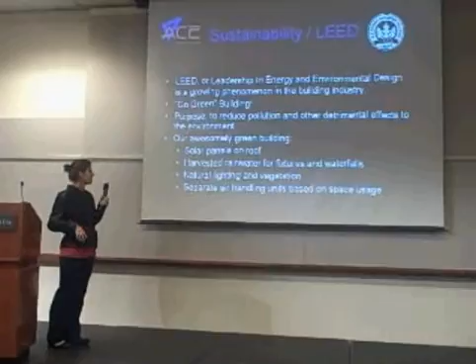Now what we did to make this work with our building is we put solar panels on the roof. This would absorb energy from the sun, and we could use it as electricity. We also harvested rain for the water fixtures outside, since it'd be kind of wasteful to use water from the city. This helps us reduce energy and save a lot of water.

We also use a lot of natural lighting. We put a lot of windows around our building that would help light it in the morning or around daytime. And like Ping explained, we have separate air handling units. This allows us to shut off energy that's not used in certain parts of the building, which helps us save a lot of money too.

So to explain construction, I'm going to hand it over to Anthony.

My name is Anthony, and I'm going to be discussing construction, and I'm going last because my team decided to save the best for last.

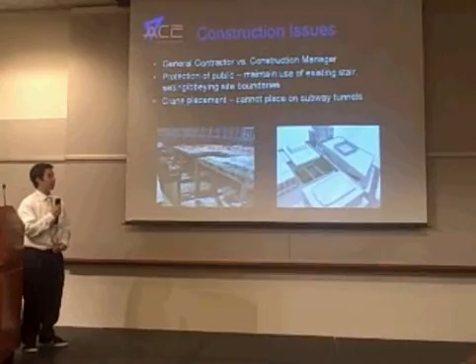So after the engineers and architects are done creating a solid final plan, they hand it over to construction. But to say construction is merely the hard labor of it is clearly an understatement. We have our own plethora of issues to deal with. One, for example, is crane placement.

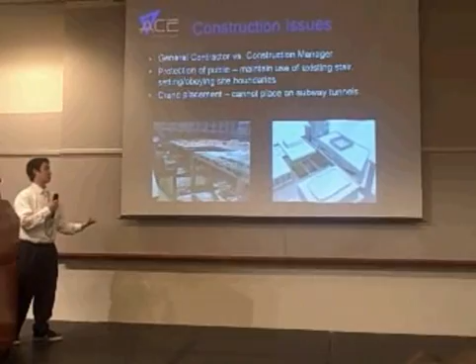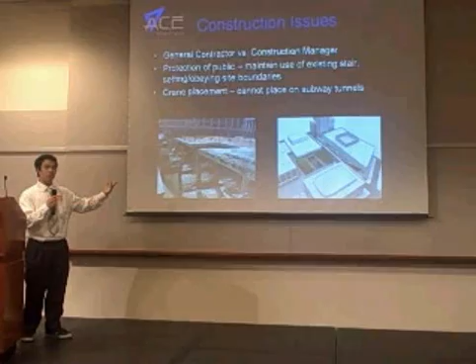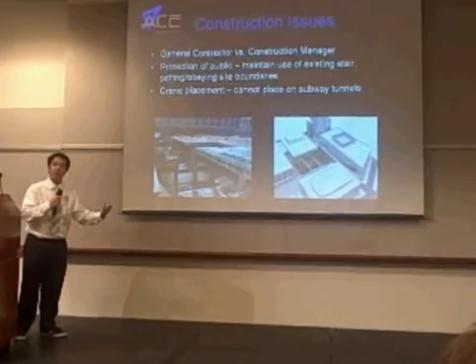Something as simple as cranes, as you see all over Manhattan, with construction going on every day, can definitely put the public at danger. Especially around Lincoln Center, which is a busy and industrial district, subway lines run through everywhere. Do we want to risk obstructing the structural integrity of our subway tunnels by putting our cranes down?

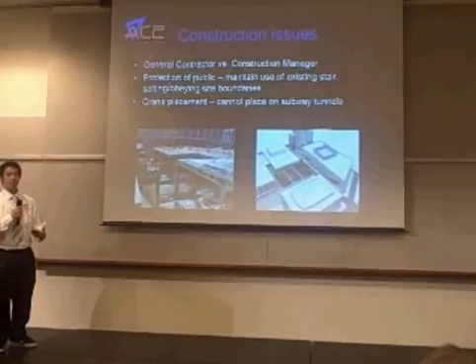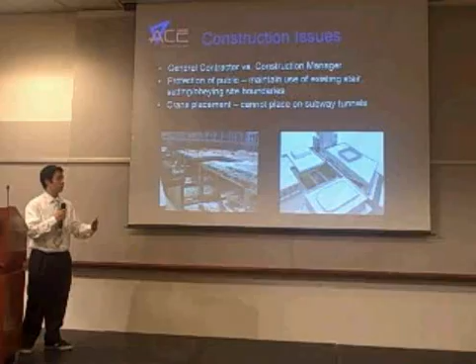This also ties into the protection of the public, because more often than not we have to go past the boundaries of our pre-established work area. But putting our work material and work process in the way of public walkways and stairs, which exist at Lincoln Center, would be putting the public at danger.

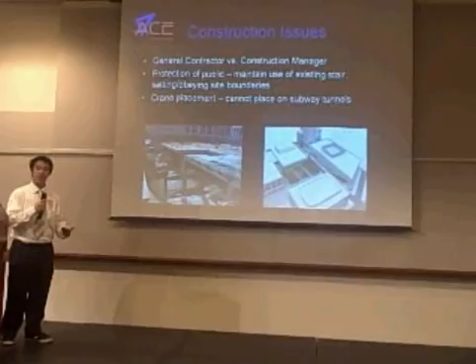So we have to sacrifice our workspace and work efficiency in order to protect the public. But sacrificing too much workspace would obviously have a negative impact on work efficiency, which would mean more cost, more funding, which would mean profits go down.

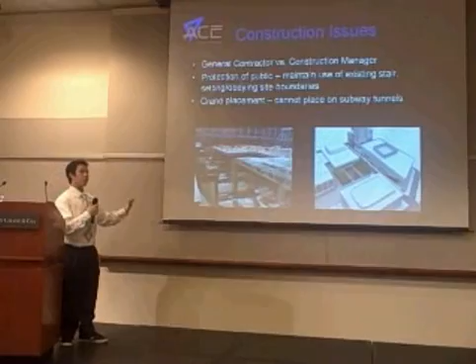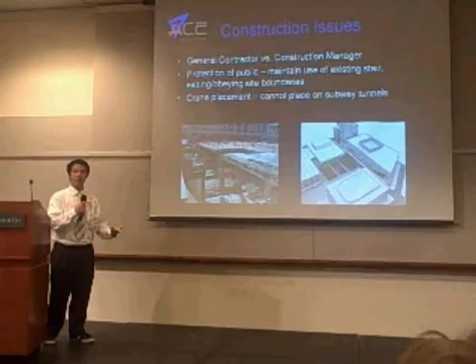And who do we hand these problems off to? General contractors and construction managers handle these problems. There's a difference between the two, if any of you didn't know. General contractors have a set fund beforehand.

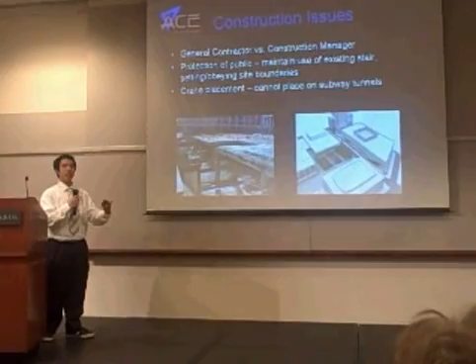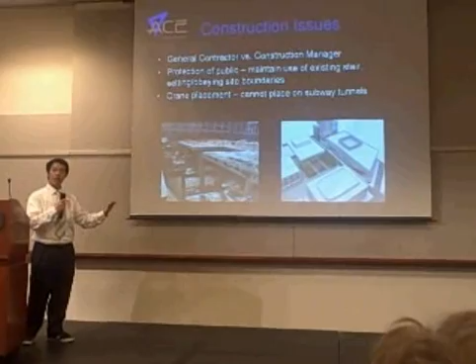You may have several general contractors bidding for a certain project, and they will propose the amount of money they think they'll need to complete it. Obviously the lowest bidder would win the project, because the company asking for contractors saves the most money by choosing the lowest bid.

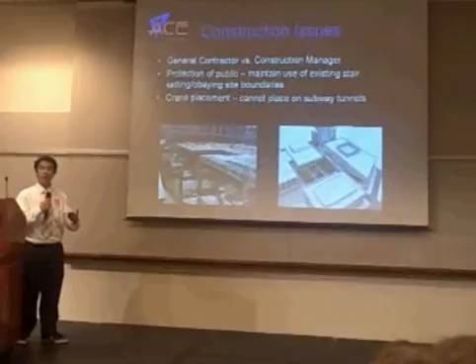But this also means the general contractor must know what he's doing, or else his profits will go down. He will have to know the supplies, the labor, how long it will take, and how much work will go into the construction in order to maximize his profits.

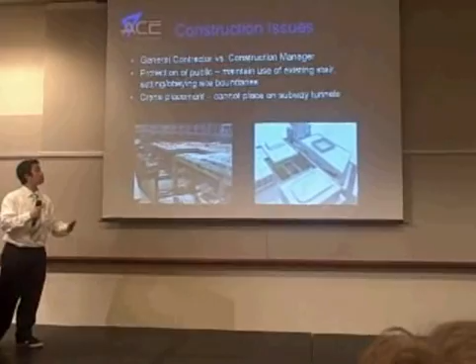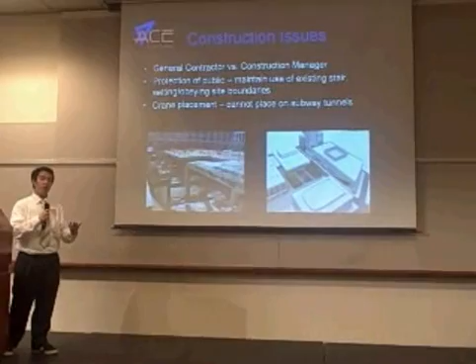Construction managers work with percentages. They calculate the same funding that general contractors have to do, but with a varying amount of money, working accordingly. So if anything goes wrong, they can adjust their funding to address the problem, as opposed to general contractors, who will always have a set amount of money.

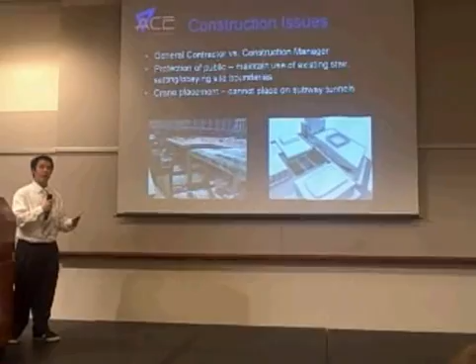I would like to thank my team for demonstrating the hate-love relationship between architects and engineers. I'm generalizing here — architects with their nitpicky stuff, always wanting things to be pretty, engineers trying to put the columns everywhere. I would also like to thank our mentors for being an influence and supportive these past few months, and for bolstering the foundations of those of us who aspire to pursue careers in architecture, engineering, and construction.